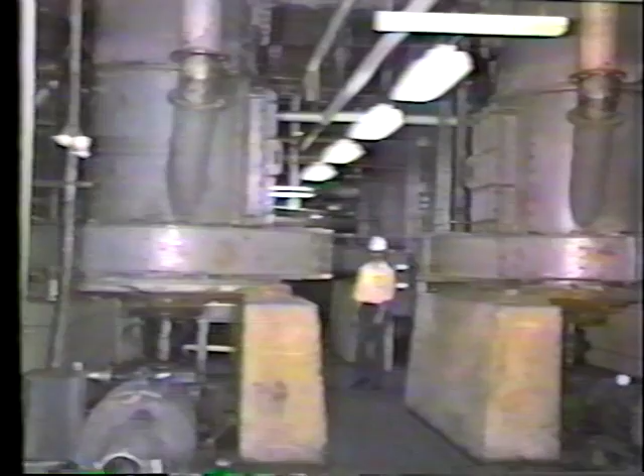Zurn boilers number 5 and number 6 are direct fired with pulverized coal. Here we see the 4 Williams DF pulverizers in operation. Each set of pulverizers feeds one boiler, as will be shown later.

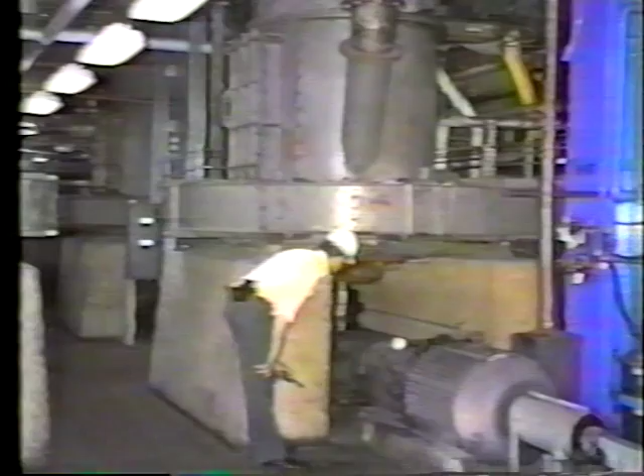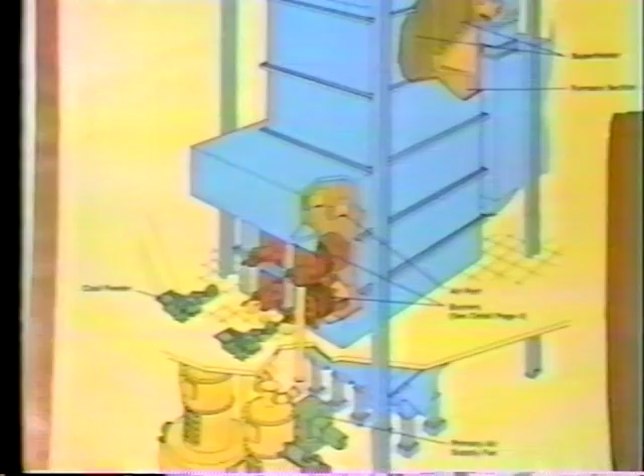This is an overview schematic of the Zurn Williams direct-fired coal pulverizer system, with the pulverizers located in the basement, the burners located just above the control room floor, and the upper furnace section complete with superheater and convection section.

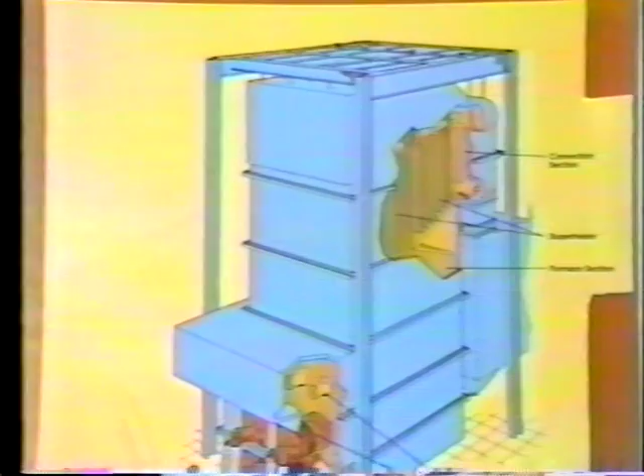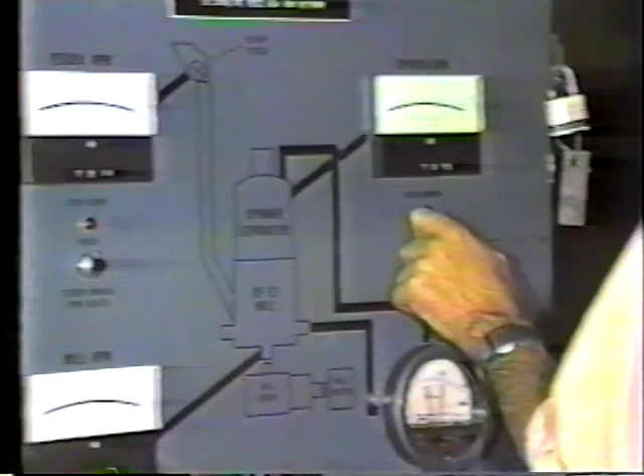Each Williams DF52 pulverizer is equipped with its own microcomputer control panel. Both manual mode, as shown here, and automatic mode is possible. During automatic mode, the boiler demand, in the form of a 4 to 20 milliamp signal, is transmitted to the computer, which in turn increases or decreases the pulverizer's speed, thereby modifying the coal production rate.

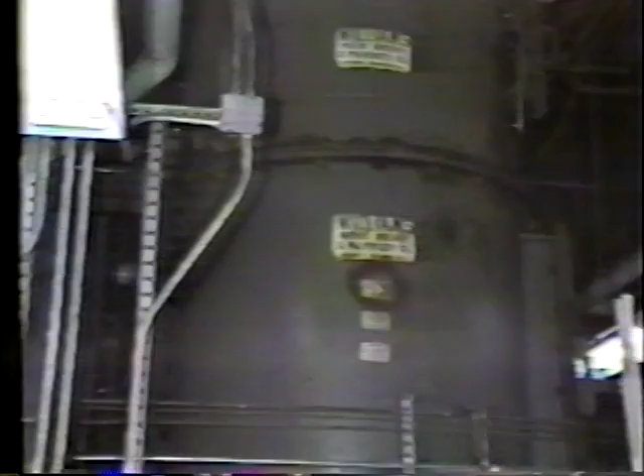Simultaneous to this, the air system is balanced so as to maintain constant air-to-coal ratio, and the active classifier, shown here, is controlled so as to achieve constant coal product size from maximum coal rate through minimum turndown.

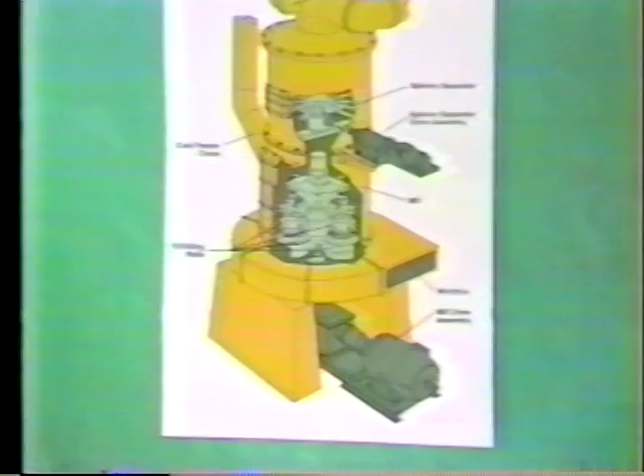The Williams patented DF pulverizer is manufactured in capacities ranging from 1 to 23 tons per hour of coal. The mill's drive skid assembly, shown here, is skid mounted for ease of removal and ease of access.

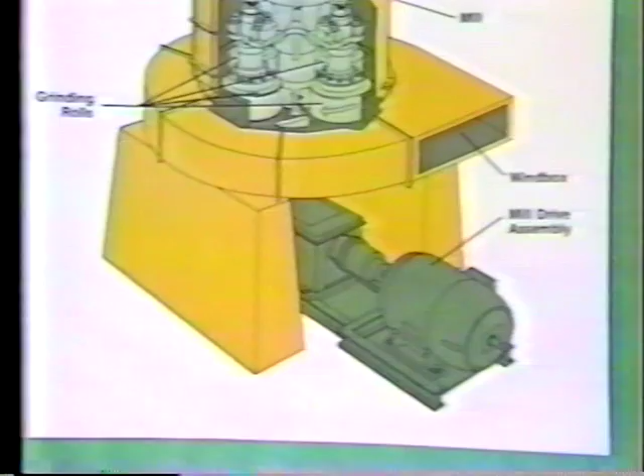Any component can be removed without disassembling the pulverizer. The pulverizer cross-section, shown here, has a large access door through which journal assemblies are easily removed for yearly maintenance. Removal of all journals takes less than 4 hours.

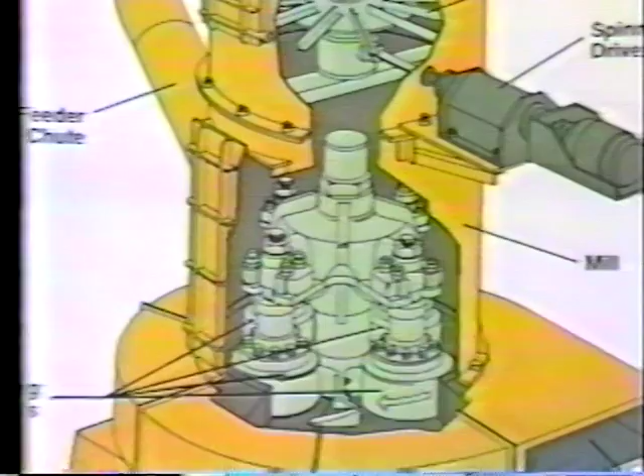This is the spinner separator, which is an active classifier and controls the coal's fineness over the entire load range.

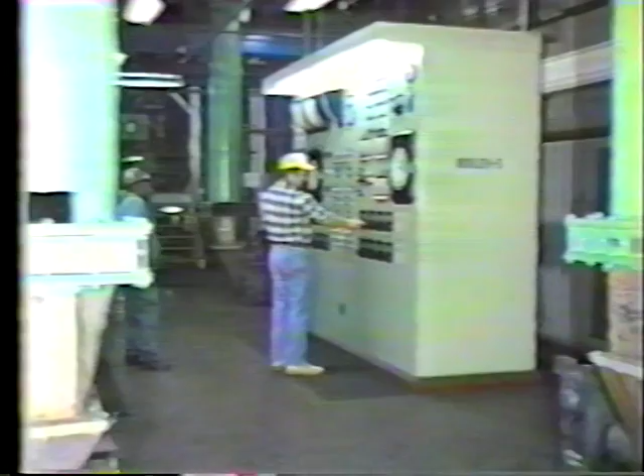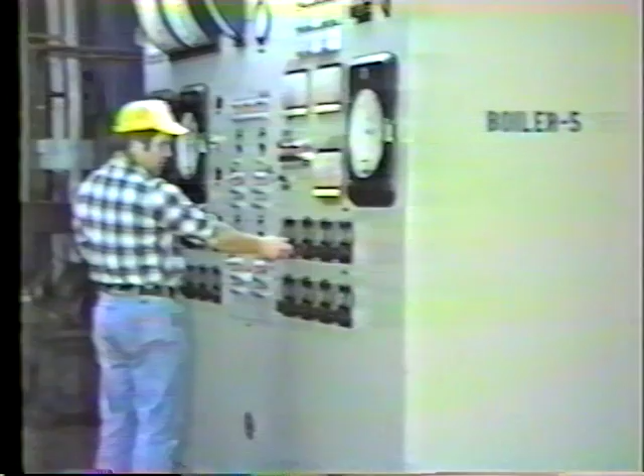This is the main control panel for the Zern boiler number 5. This system is designed to produce 220,000 pounds per hour of steam, or 240,000 pounds per hour on a continuous peak basis. The steam pressure is 250 psi gauge and is saturated.

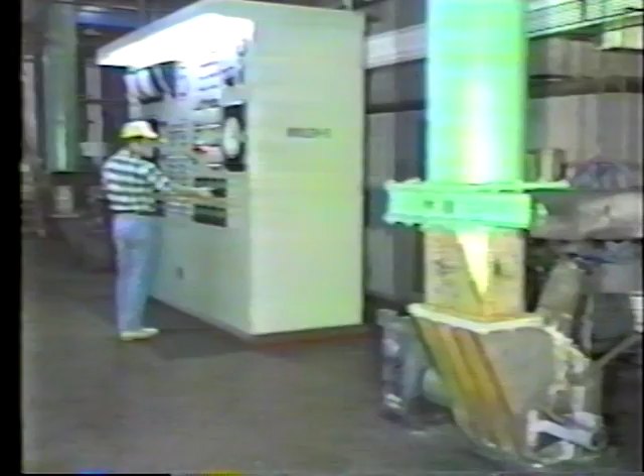Since the facility is located adjacent to the U.S. Mint, the Zern design also incorporated the possibility of burning shredded paper money. However, at this time, the main fuel source remains number 6 fuel oil and or coal as fed by the Williams pocket feeder.

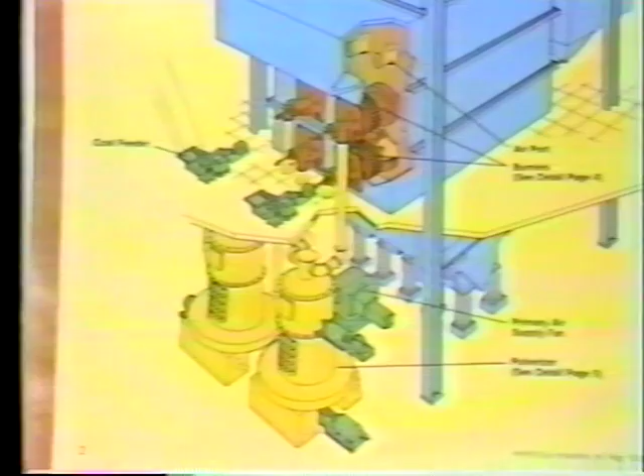The feeder is driven by means of a 5 horsepower variable speed clutch and gear reducer, allowing infinite speed changes under direction of the microcomputer shown earlier.

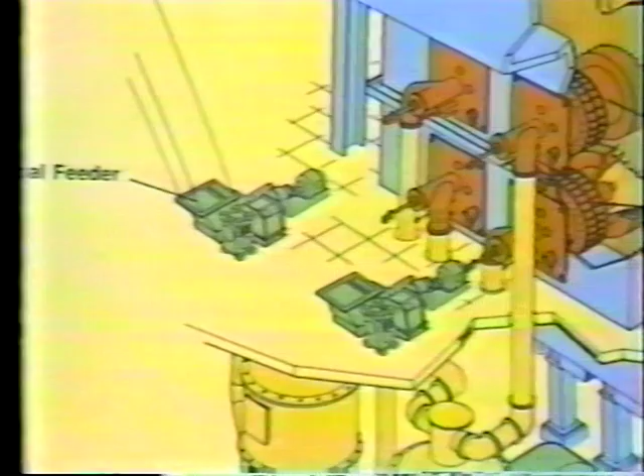With an inspection port removed, it is possible to see the coal as it is valved into the pulverizing system. This is Virginia bituminous coal with a heating value of 13,500 BTUs per pound.

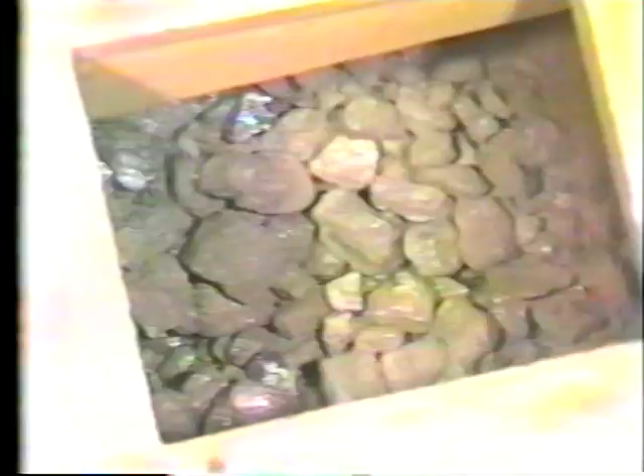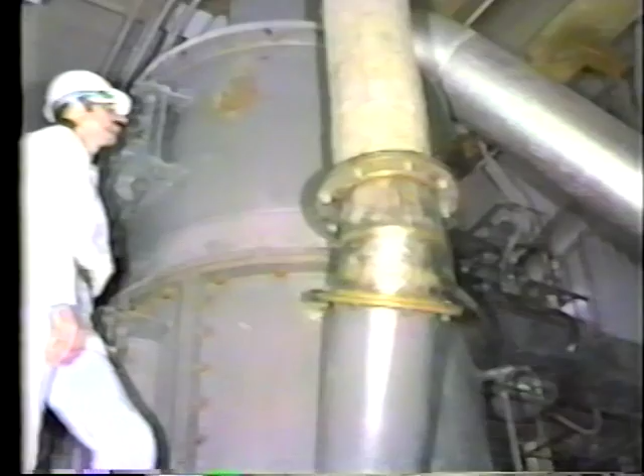After delivery by railroad car to this plant site, it is pre-crushed to this -2 inch and bunkered overhead. The coal then drops by gravity into this volumetric pocket feeder, which valves the coal into the system. The sound you hear is the coal dropping into the pipe. The pulverizer makes little to no sound.

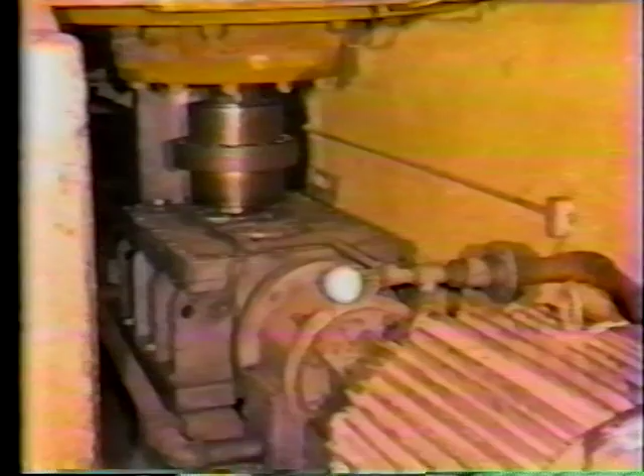Shown here is the drive skid with the main drive motor, variable speed clutch, and right angle gearbox and coupling.

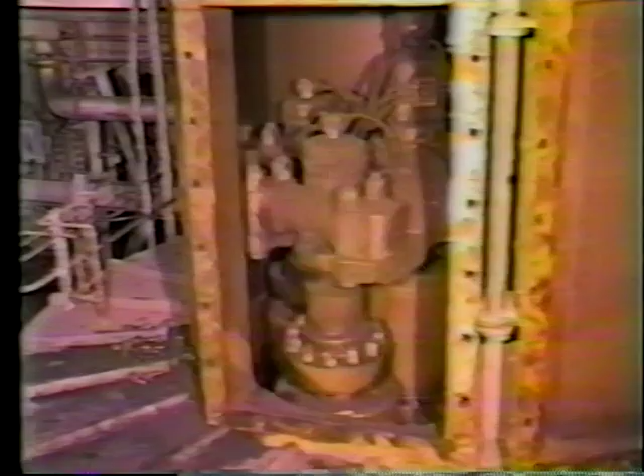For purposes of demonstration for this picture, the pulverizer access door has been opened and the Williams pulverizer operated in a slow speed mode. Note, faster operation would be hazardous.

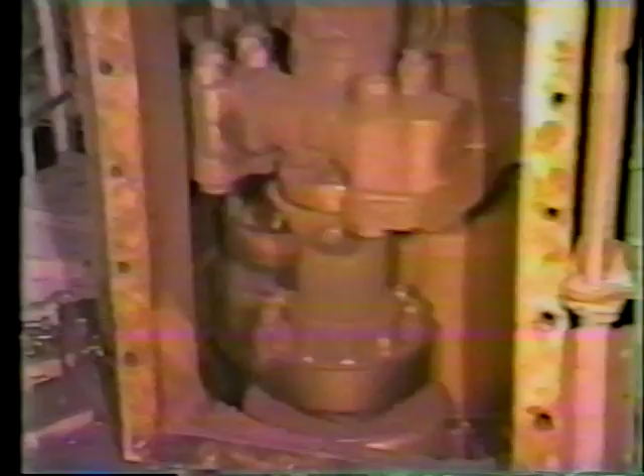The grinding operation is as follows. Coal falling into the grinding zone is lifted both by plows located ahead of each grinding roll and fluidizing air entering tangentially around the pulverizer.

Pulverization takes place between the Ni-Hard grinding roll and the forged bull ring. Grinding roll assemblies are free to pivot and have no springs as compared to competitive bowl mills.

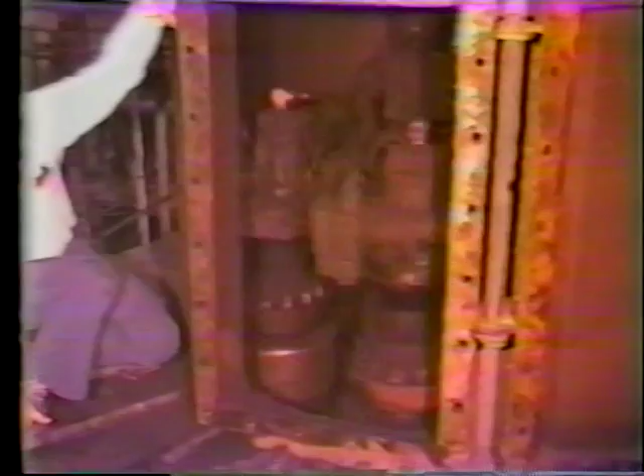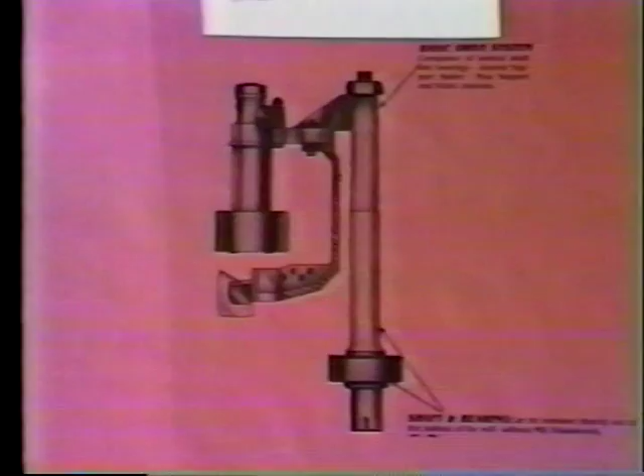Capacity adjustment is achieved from 100% to 0% output by varying the central rotational speed. Since centrifugal force varies as the square of the rotational speed, so production will increase or decrease accordingly.

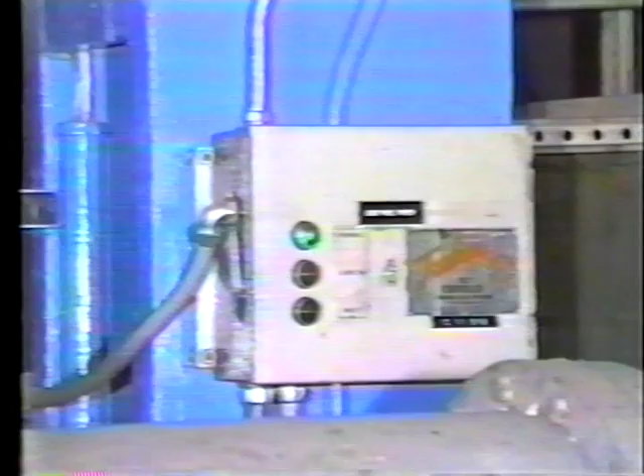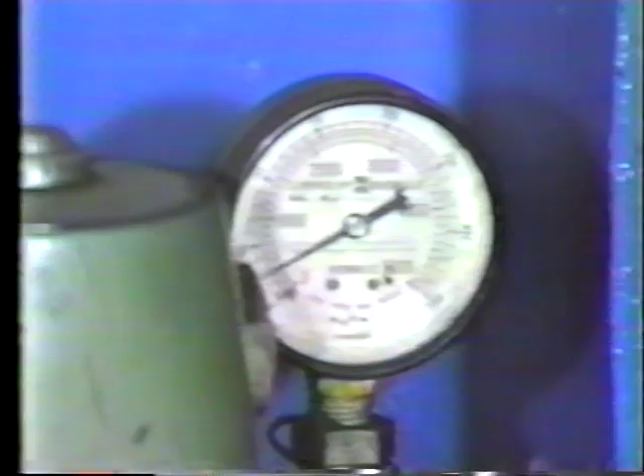Automatic lubrication of the journals and all other bearings is accomplished through the use of a Trabon automatic lubrication system connected to divider valves which meter lubrication under pressure to each journal. An air-operated barrel pump causes lubricant to be moved under pressure to each metering valve.

Pressure failure alarm or broken line indication automatically alerts the system operator so that he can plan a shutdown.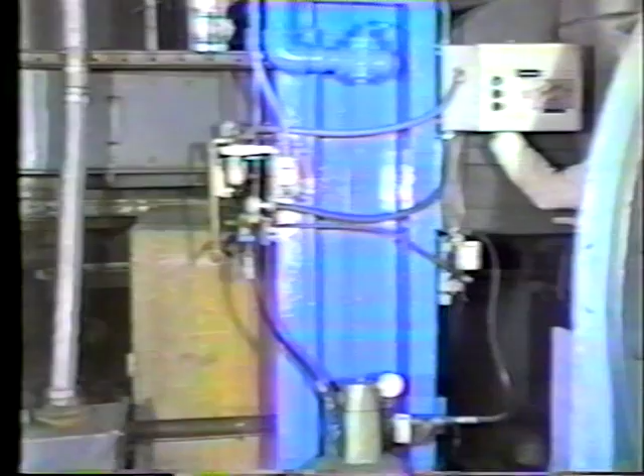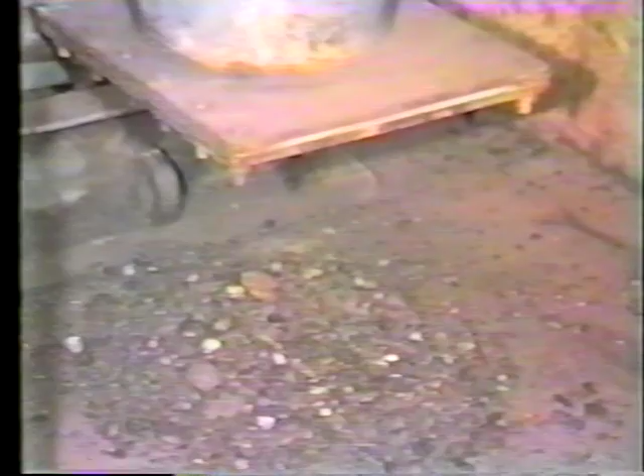Each Williams DF pulverizer is equipped with a tramp metal throwout. By opening this large gate, removal of tramp metal and hard-to-grind materials is accomplished. This is normally done periodically.

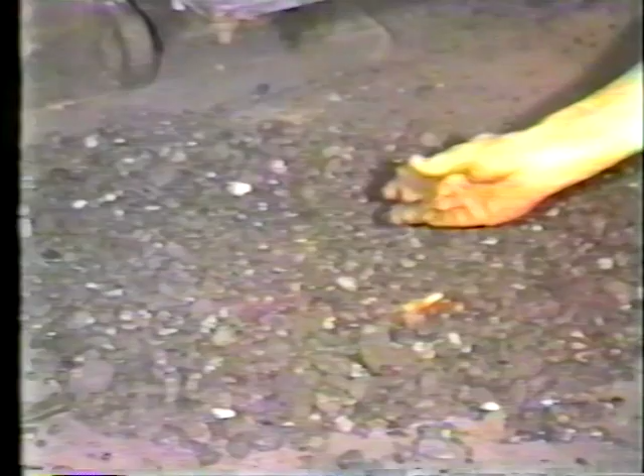Hard-to-grind particles such as iron pyrites, slate, and gravel will accumulate at the bottom of the fluid bed and can be dropped out of the system as needed. It is possible to beneficiate marginal coals by continuously removing hard-to-grind materials such as pyrites.

Tramp metal will sink to the bottom of the fluid bed for periodic removal. In addition, should a furnace trip occur, the mill can be unloaded if desired by jogging with the tramp metal chute opened.

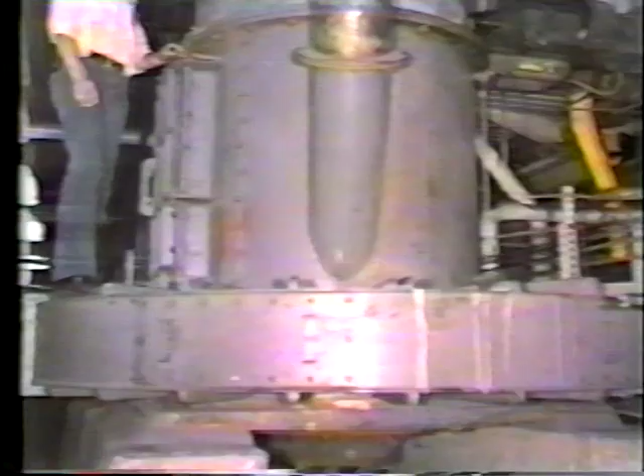The DF mill is driven by an external gearbox, thereby eliminating contamination problems. Leakage from inside the mill is not possible. Thus, Williams has the most advanced direct-fired coal pulverization system in the field today.

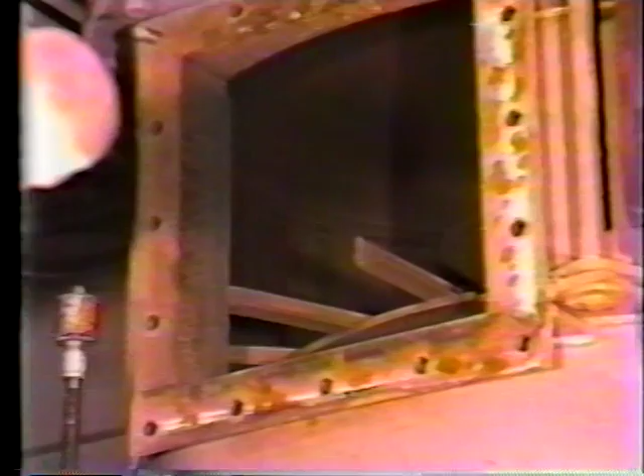In addition, Williams uses an active classifier we call a spinner separator, shown as the variable speed drive system. Because of the active classifier design, sieve analysis of the pulverized coal remains constant at high or low loads. At 70% minus 200 mesh, there is zero 50 mesh oversize.

Pulverized coal and air rise into the separator, where spinning blades force the heavier particles back down for regrinding at the mill zone.

Air bustles or wind boxes surround the DF mill, conveying hot gases into the grinding chamber. These gases simultaneously dry the surface moisture from the coal and convey at the same time, resulting in a turbulent fluid bed that promotes rapid drying of the wet coal.

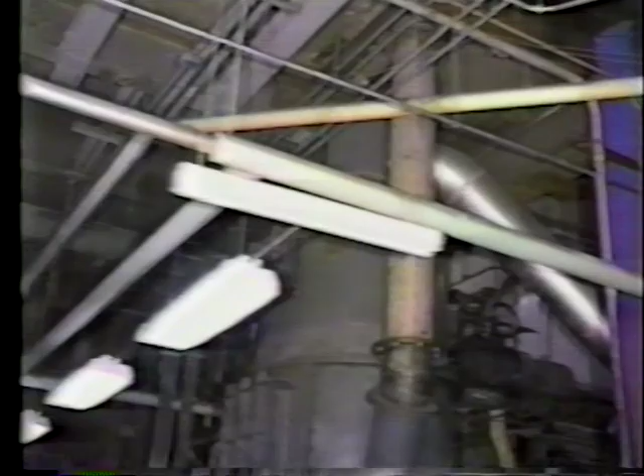The properly sized coal exits the spinner separator from the top and in a negative system such as this is sucked into the primary air fan inlet. Here we see the fan driven from the same motor as the pulverizer via a jackshaft and V-belt drive. A separate fan drive is of course optional.

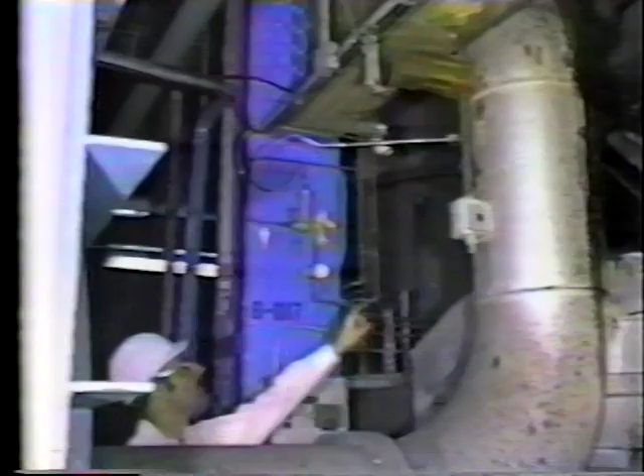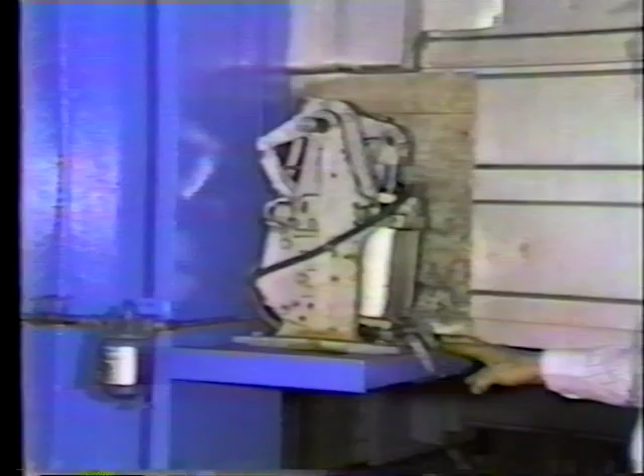A temperature sensor located in the ductwork ahead of the fan senses the system temperature, which is normally maintained at or about 180 degrees Fahrenheit. This sensor connects to a transmitter that feeds back to a temperature controller. The controller pneumatically adjusts a lever-equipped operator, which in turn opens and closes cold air barometric dampers.

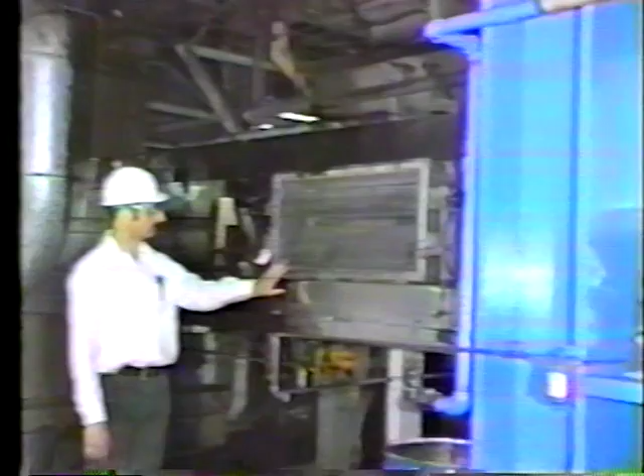Hot gases drawn into the negative pressure system from the furnace air preheater is thus tempered and controlled to do the drying job without overheating the coal. The coal's normal exit temperature is 150 degrees Fahrenheit, and it is air conveyed down this pipe and into the primary air fan.

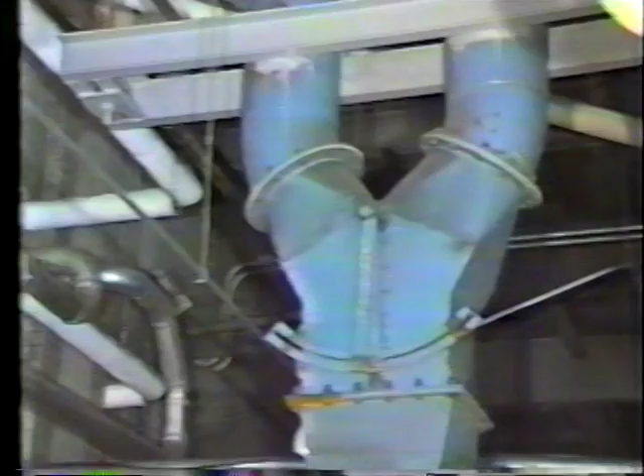From the fan, the coal air mixture travels upwards to the burners. Since this furnace is equipped with 2 burners for each pulverizer, the coal-air mix first traverses a set of splitter valves. Each leg of the valve is adjustable, and thus an equal coal-air load can be regulated to both burners that are located several stories above the pulverizer floor.

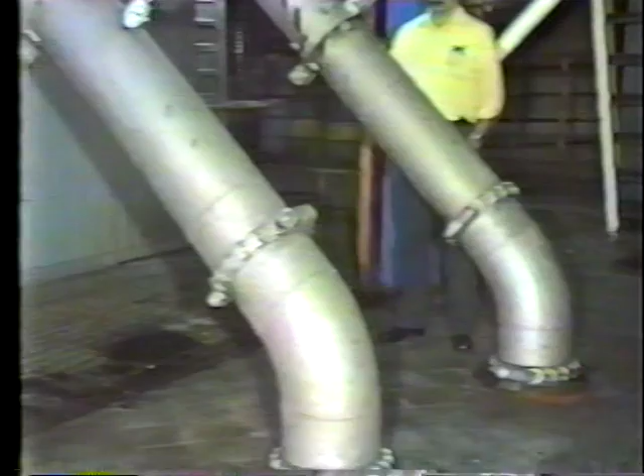All coal piping consists of easily replaceable standard steel piping with standard elbows joined by quick-fit couplings. We are now at the main control center level, and here we can see the coal pipes as they emerge through the floor and continue on up to the burner level.

At this time, the coal-to-air ratio is 2.7 pounds of air per pound of coal, and the coal has been dried from 8 to 10% moisture down to less than 1%.

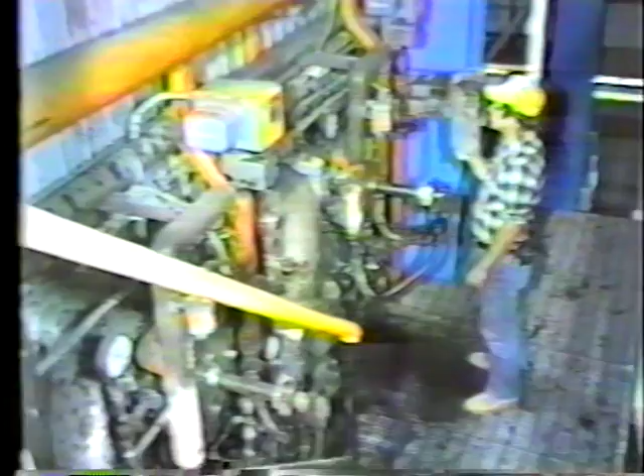Zurn design, engineers, and constructs burners to complement each steam generating system. The Zurn pulverized coal burner shown here is also equipped with an oil gun assembly for burning number 6 fuel oil.

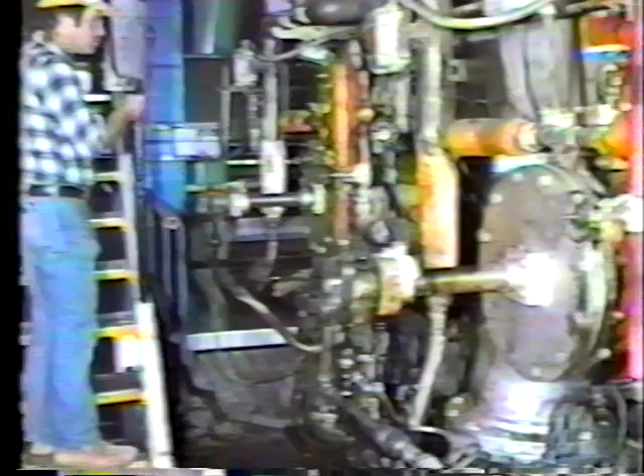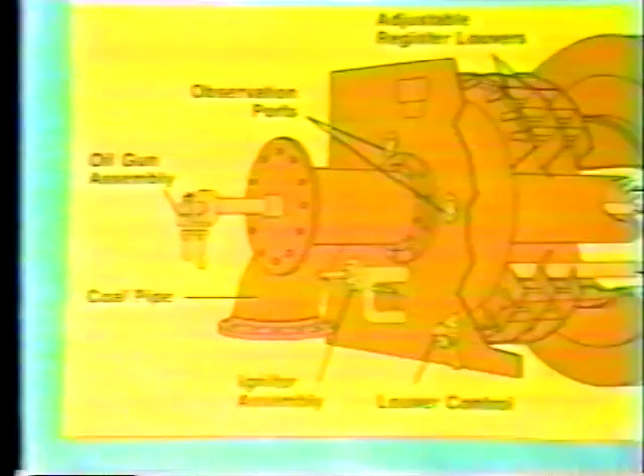This is a cross-section of the Zurn burner. Pulverized coal enters through a coal inlet pipe shown at the bottom left. Number 6 oil enters through the oil gun assembly, center left, and both fuels flow down the barrel and are dispersed by a diffuser into the secondary airstream.

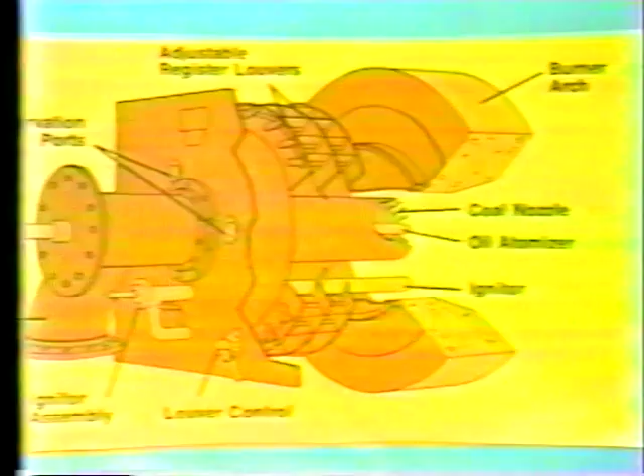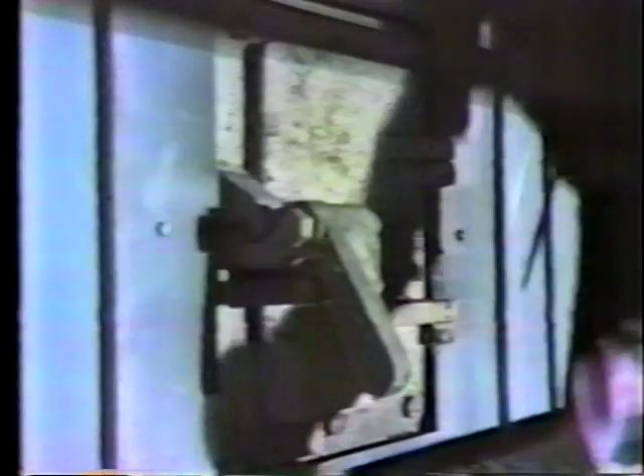Dual air registers can be used to optimize secondary air distribution. By opening a port in the side of the furnace, we can now take a look at the burner from the side as it burns coal.

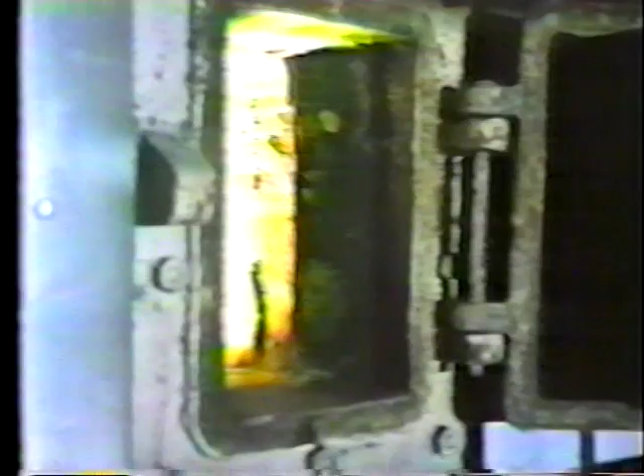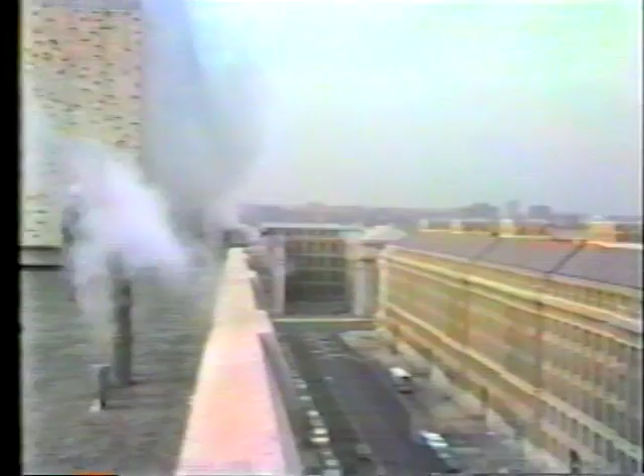The main purpose of the Washington, D.C. Central Heating Plant is to supply steam to all the major government buildings, such as the Bureau of Engraving and Printing, as shown here, the Department of Agriculture, shown to the right, the Washington Monument, shown in the background, the White House, and all other important government buildings.

The Zurn-Williams pulverized coal-fired system utilized to heat these buildings is designed to meet air pollution control standards. This system starts with the Williams pulverizer integrated into a compatible air handling system complete with Zurn burners, boilers, and necessary air pollution control components, culminating in a total systems approach that is both reliable and cost-effective.

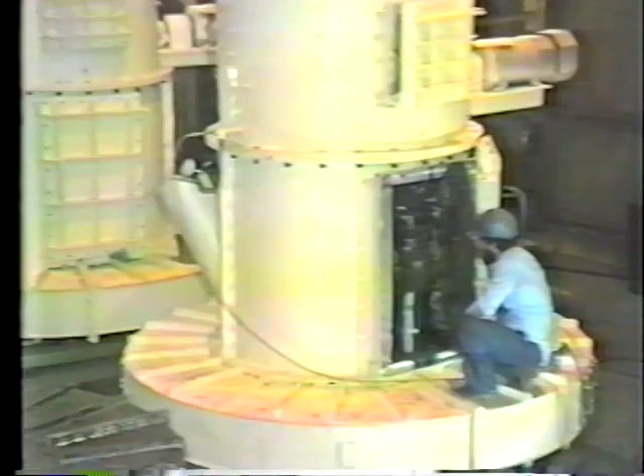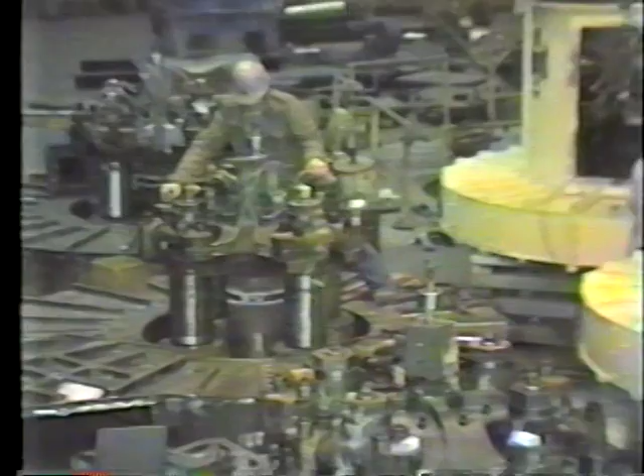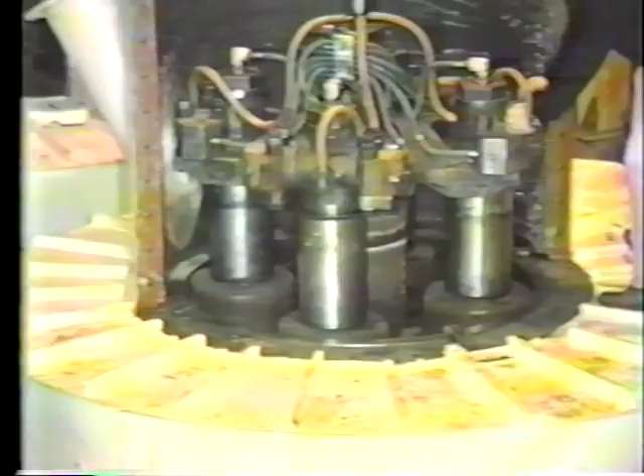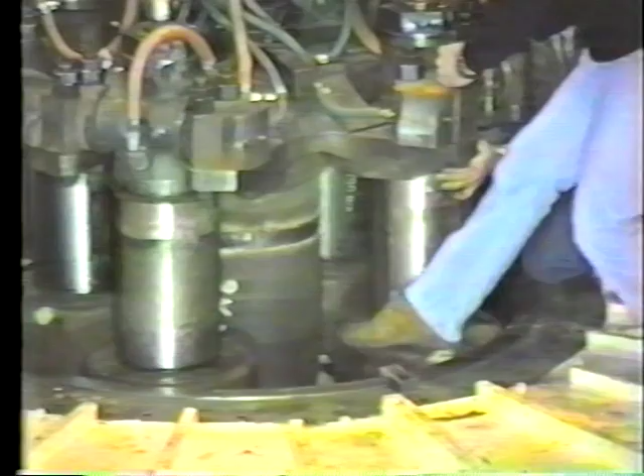Both of you turn them. Can you turn yours around, Bill? Keep going. Okay, now I'm coming around to Bill, who's turning his. Okay, bring it around so that we can see the lubrication system. All right. Okay, show me how that thing rotates. Now, can you spin it? No, the journal itself, rubbing against the bull ring? Yeah. All right.